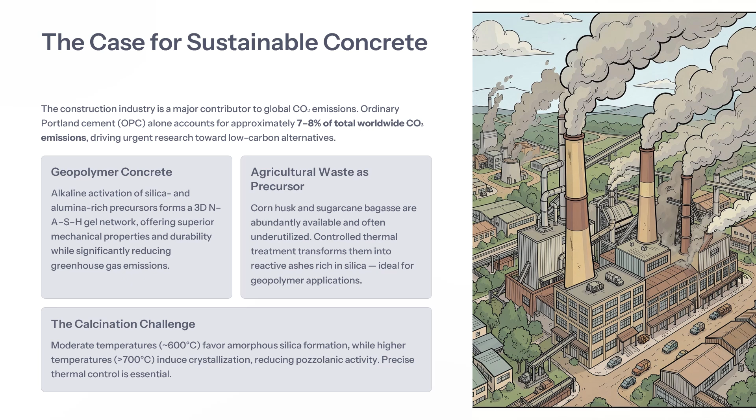For raw material, corn husk, abbreviated here as CH, and sugarcane bagasse were washed, oven dried at 105 °C, ground and calcined at 600 °C and 750 °C for 2 hours in a muffle furnace at 10 °C per minute. Fixed system: for the alkaline activator, we use 10 M NaOH plus Na2SiO3 at a ratio of 2.5, prepared 24 hours prior to use for complete dissolution and thermal stability.

For mix design, 12 geopolymer concrete mixtures from G1 to G12 were prepared with a constant liquid to binder ratio of 0.35. Replacement ratios of 50%, 75% and 100% were tested for each type plus hybrid combinations. For characterization, we use XRF for chemical composition, which measures oxides, XRD for phases, and FTIR for functional groups from 400 to 4000 cm⁻¹. We also use laser diffraction for particle size, D50 and surface area.

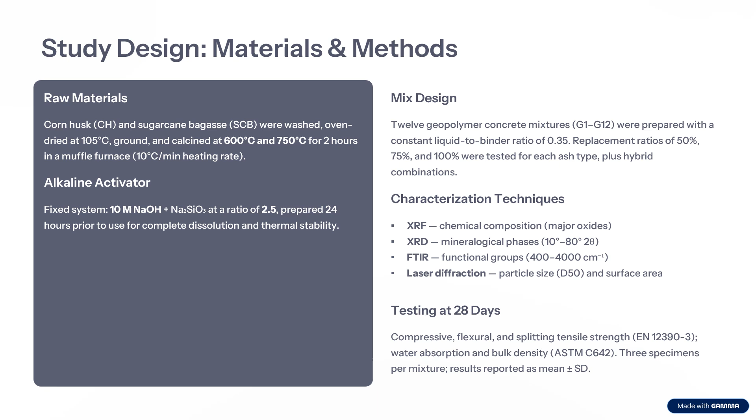After that, we perform compression, flexural and tensile testing after 28 days, and also water absorption and bulk density following the standard ASTM C642. 3 specimens per mixture, results reported as mean plus minus standard deviation.

For the chemical composition, XRF shows that silica was the dominant oxide across all ashes, and SCBA exhibits significantly higher silica content than CHA, directly enhancing geopolymerization. All samples exceeded the 70% combined SiO2 plus Al2O3 plus Fe2O3 threshold per ASTM C618 for pozzolanic material. For example, the oxide SiO2 at A600 is around 62.37, Al2O3 around 5, CaO around 8, and LOI at 12.57.

So SCBA recorded a higher silica percentage, up to 78% versus 62 for the CHA. Higher silica directly promoted N-A-S-H gel formation and matrix densification. For LOI, the residual carbon impact, CHA 600 showed LOI around 12%, indicating unburned carbon that creates porous inclusions, and increasing calcination to 750 reduced CHA to 10%, improving combustion efficiency.

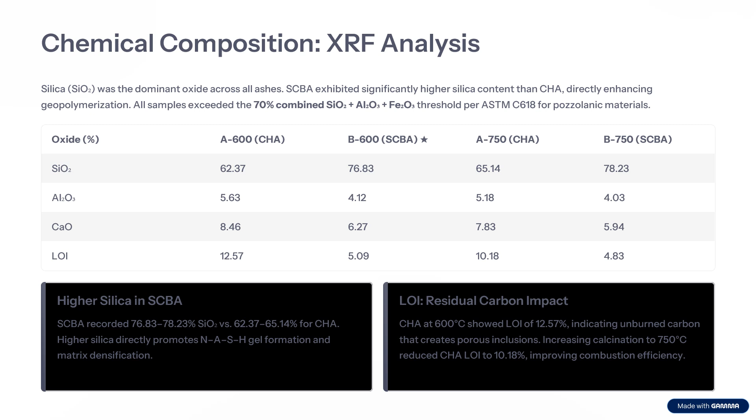For the XRD, at 600 °C, both ashes show a broad amorphous hump at 22 to 24 degrees 2 theta, characteristic of reactive amorphous silica. SCBA at 600 °C exhibits the most pronounced amorphous character with minimum crystalline peaks. At 750 °C, sharp peaks for quartz at 26.6 degrees and around 20 to 22 for cristobalite, more pronounced in SCBA, confirming partial silica crystallization that reduces geopolymer activity.

For FTIR, all samples show a dominant Si-O-Si asymmetric stretching mode at 1095 to 1115. At 600 °C, the band was broad and less defined. At 750 °C, it was sharp, combined with peaks at 788 to 792, associated with crystalline silica. CHA samples show additional organic residual peaks at lower calcination temperature, consistent with higher LOI value. FTIR findings strongly correspond to XRD results.

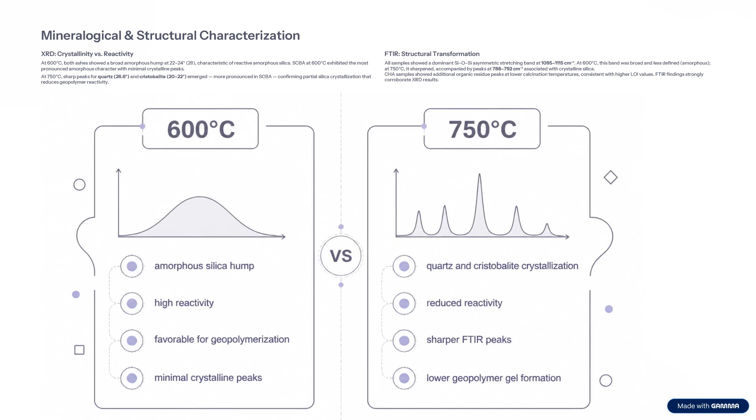For comparison, at 600 °C, we have amorphous silica, higher reactivity, favorable for geopolymerization, minimum crystalline peaks. 750 °C shows quartz and cristobalite crystallization, reduced reactivity, sharper FTIR peaks, and lower geopolymer formation.

Particle fineness after ball mill grinding: SCBA samples achieve finer particle sizes than CHA at both temperatures. B600 SCBA recorded the finest particle, with D50 of 14.2 micrometers and a high surface area of 368 square meters per kilogram, attributed to its amorphous, friable silica structure offering less resistance to

comminution. For example, sample A600 shows D50 of 18, Blaine 312.5, and specific surface area 1.2, assessed as moderate. The highest value was at B600, 14.2 micron size, with Blaine around 368, specific surface area 1.47, which is high and optimum. 750 shows a higher particle size, around 21.8, with lower specific surface area. 750 SCBA shows 16.4 with a lower specific area of 1.3 and can be good.

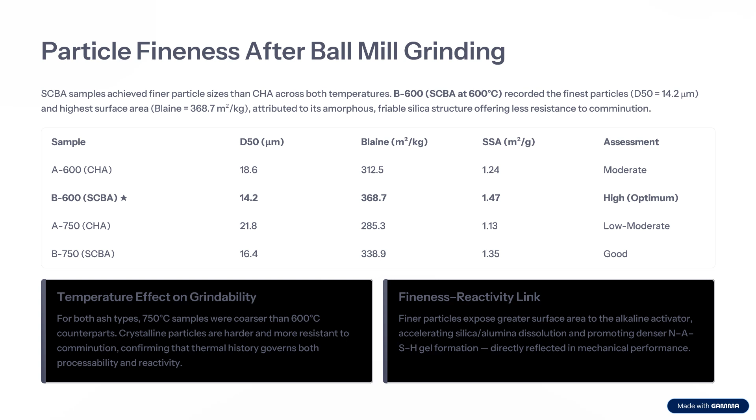The temperature affects grindability for both ash types. 750 samples were coarser than their 600 counterparts. Crystalline particles are harder and more resistant to comminution, confirming that thermal history governs both grindability and reactivity. Finer particles expose greater surface area to the alkaline activator, accelerating silica dissolution and promoting denser gel formation, directly reflected in the mechanical performance.

For the mechanical performance, the compressive strength results after 28 days. The highest compressive strength was achieved by mix G2, 37.9 plus or minus 0.8 megapascal, 75% SCBA calcined at 600 centigrade, comparable to the metakaolin-based geopolymer concrete at 35.8 megapascal. SCBA mixtures G1 to G3 consistently outperform CHA mixtures G4 to G6 across the replacement levels. The SCBA 75% at 600 centigrade benchmark mixture was 37.9.

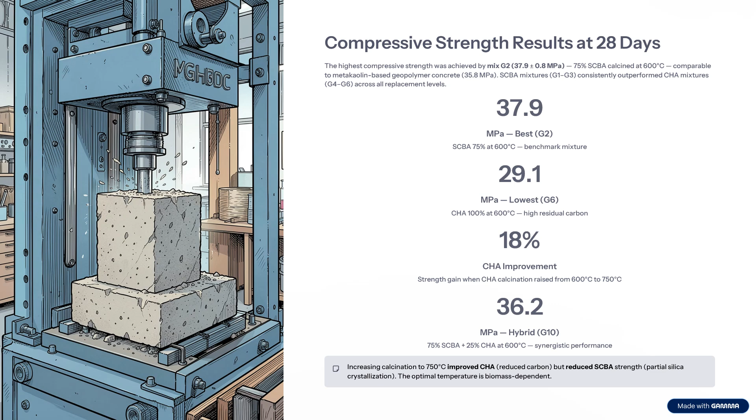CHA 100% at 600 centigrade shows higher residual carbon and the lowest mechanical strength, around 29.1 megapascal, and CHA improvement around 18%. The hybrid G10 shows mechanical strength around 36.2. From that we can see increasing calcination to 750 improves CHA by reducing carbon, but reduces SCBA strength due to particle size and partial silica crystallization. The optimal temperature is biomass dependent.

Next, flexural, tensile strength and physical properties. Flexural and splitting tensile strength followed the compressive strength trends, confirming that matrix integrity governs all mechanical properties. Mix G2 also led with flexural strength around 5.46 megapascal and splitting tensile strength of 3.74. SCBA mixtures demonstrated superior tensile performance due to a more homogeneous, cohesive matrix. CHA mixtures showed lower values at 600 centigrade due to porosity from residual carbon, but improved at 750 centigrade.

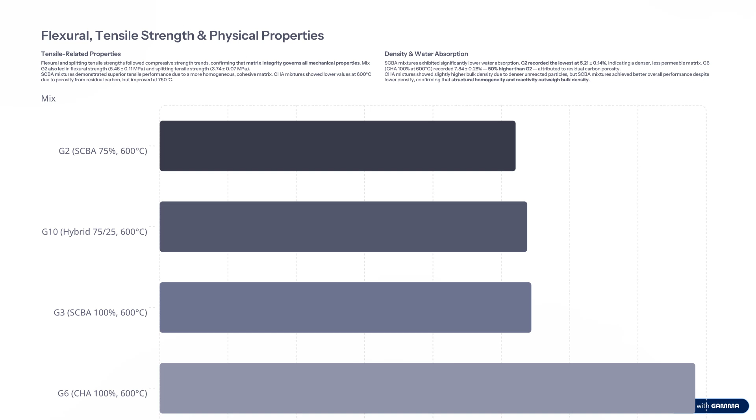For density and water absorption, SCBA mixtures exhibit significantly lower water absorption. G2 recorded the lowest at 5.21, indicating a denser, less permeable matrix. CHA 100% at 600 centigrade recorded 7.84, 50% higher than G2, attributed to residual carbon porosity. CHA mixtures show slightly higher bulk density due to denser unreacted particles, but SCBA mixtures achieved better overall performance despite lower density, confirming that structural homogeneity and reactivity outweigh bulk density. G6, CHA 100% at 600 centigrade, shows the higher value for water absorption.

As for the data-driven correlation and predictive analysis beyond trial and error, this study links precursor chemistry, the SiO2 content and LOI level, to mechanical performance across the 12 mixtures, providing a quantitative framework for precursor selection. We prefer B600 SCBA, G1 to G3, with silica 76%, LOI 5%, and mean strength around 36.77. However, with higher silica, the mean strength was reduced to 33. With low silica, we have the lowest mean strength, around 30.4.

For the correlation of SiO2 versus strength, R squared is 0.6, strong positive, and for LOI it is around 0.83, strong negative. So higher reactive silica and lower residual carbon are jointly associated with improved mechanical performance.